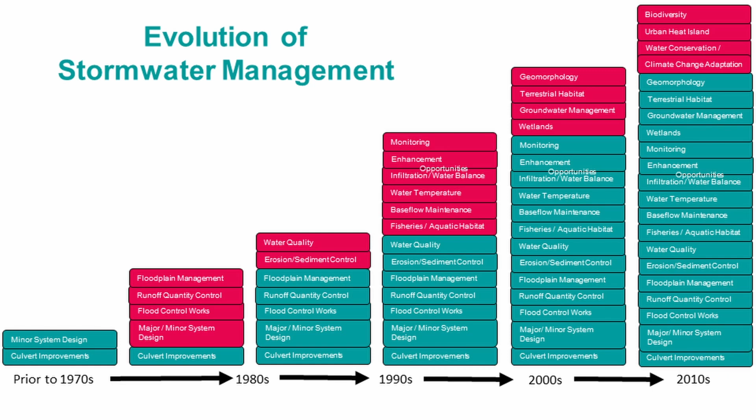Going back from pre-1970s, it was just get the water off the property as quickly as possible. Then moving into the 1980s, more thought around floodplain management and flood management, seeing more dry detention basins. Then into the 1990s, more turn to focus on non-point source or urban pollution. We start seeing some of the big wet ponds to try to manage that pollution.

And then to now, where we have this long list of things, in the 2010s, and realizing that the way we're going to address these is really recreating the natural hydrology. The way we do that is through more distributed stormwater management, doing more infiltration, sustainable urban drainage. So call it what you will. Back east, they call it low impact development. Around North America, they're calling it more commonly green infrastructure.

I tell people I work with in green infrastructure, they think I'm installing solar panels. So to be more specific, we'll say green stormwater infrastructure or green rainwater infrastructure. Over in the UK, they call it sustainable urban drainage systems, which I love because it's very descriptive and it has that awesome acronym of SUDS. But I'll be calling it green infrastructure or GI throughout this presentation.

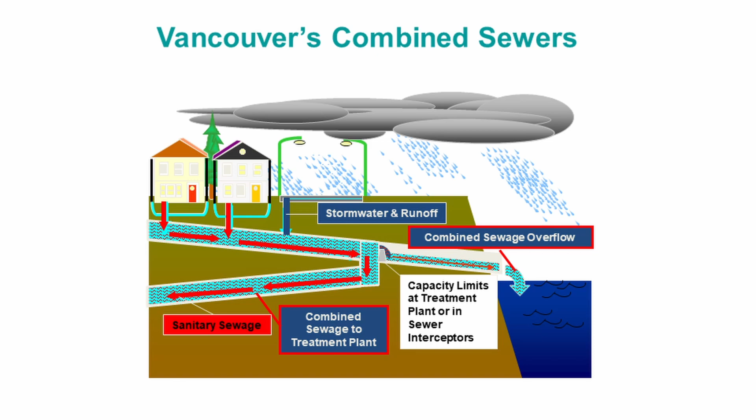There's a lot of different ways cities are tackling their combined sewer systems. Most are not bothering to separate them. They're finding other strategies to eliminate those overflows. Vancouver is on the path to separating its sewers. We've been doing that since the 1970s. We're to a point where half the pipes have been separated.

But essentially, because the trunks are still combined, all those separated pipes still go into a combined pipe. The whole system essentially functions as a combined system. So it's going to be at least another 50 years until it's fully separated. Making one pipe two pipes might sound simple, but when you consider the thousands and thousands of properties that also have combined pipes, it's a very complicated process.

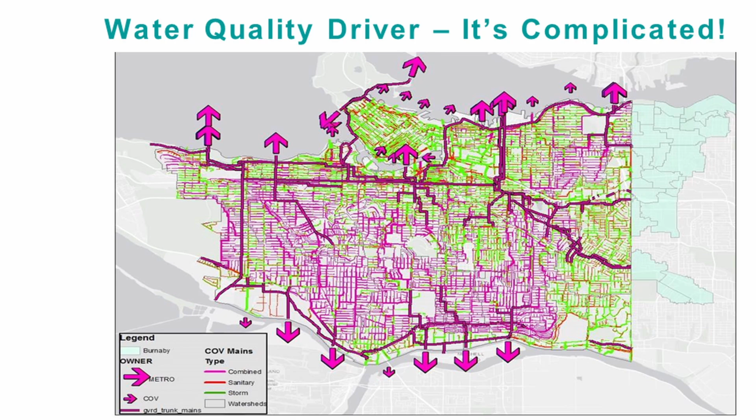Which takes me to why it's often really complicated for me to explain how green infrastructure is addressing water quality. When I've worked in those other combined sewer overflow communities, the goal is just to take water out of the pipes, keep the stormwater out of the pipes, and that translates into reduced overflow. When I worked in separated communities like in Mississauga, it's all been about cleaning the stormwater. But because we're in this transition right now, the green infrastructure, we're keeping volume out, which translates into less overflow. But then once the pipes are separated, that green infrastructure will be doing stormwater duty.

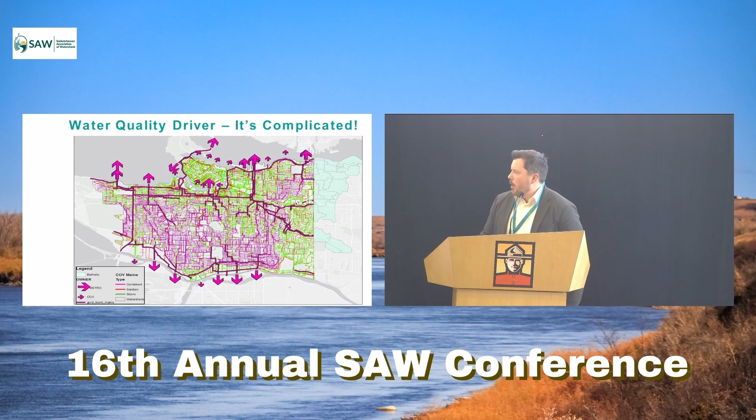This is one area that, coming to the city, I've actually had to do a lot of educating, because there's been so focused on just separating the sewers. We just got to stop this horrible combined sewer overflow. But what's been lost sight of is the hazards of stormwater. Stormwater is still toxic to the environment, and we don't want to trade just one problem for another.

So really, the sediment load between the two are very similar, but with the sanitary and combined sewer overflow, it's higher in the organics and bacteria, while the stormwater is higher in metals and hydrocarbons.

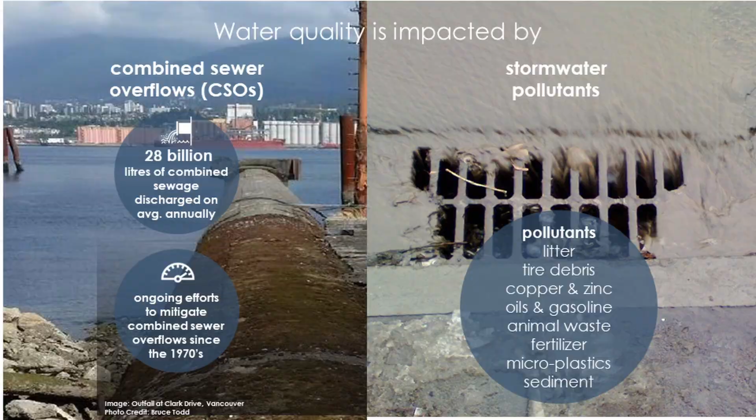So for other drivers, climate change: we're having wetter winters, more intense storms. We're addressing this in our future design, so we've updated our extreme storm design events and are upsizing our pipes for that. But we have all of this infrastructure built for those storms of yesteryear. So

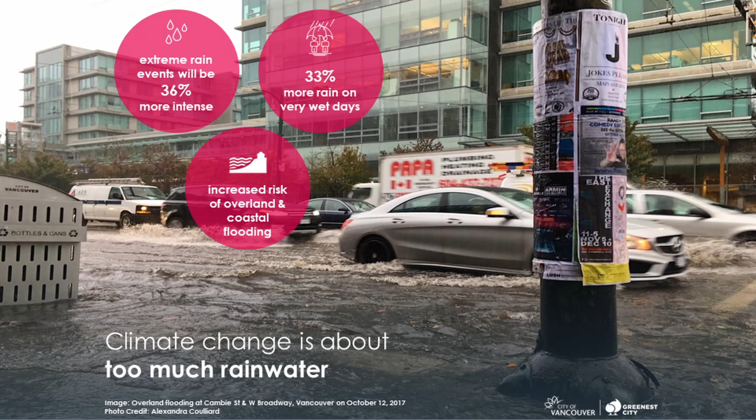have summers with less rain. We're dealing with too little rain. So our urban forest canopy is suffering. And those rare rain events that we do get in the summer, it's bypassing the soils and the trees. It's being wasted down the gutter.

So we're also doing green infrastructure to reduce urban heat island. And urban heat island has always been part of this long list of ancillary benefits. Really, we're doing green infrastructure for water quality and hydrology, but look at all these nice other things that it does. But this event in 2021, the urban heat dome, really changed that mindset.

You could consider this one of the deadliest weather events in Canadian history. Just in Vancouver, 117 people died. Recommendations was not just that cities need to redouble their efforts on urban canopy, but I was really appreciative that that report also emphasized the need for permeable surfaces. So we're getting that water into the ground so that it's available to be evaporated to cool the environment and also access for the trees.

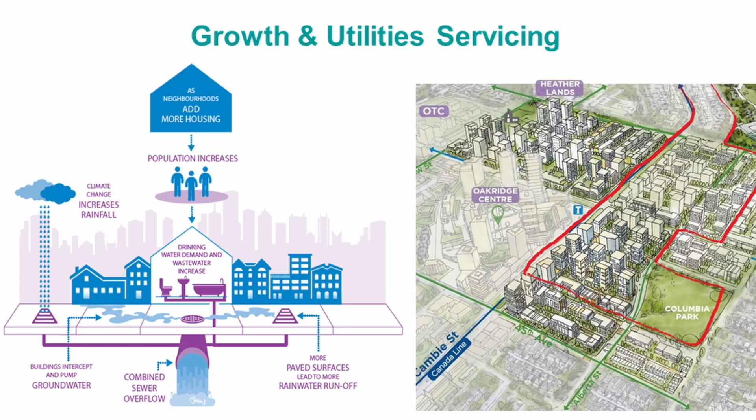Another driver is growth. We're densifying the city, huge housing problem. We have all these single-family residential neighborhoods that are getting turned over to mid-rise, high-rise development, lots more impervious area. So we're using green infrastructure to also compensate for those impacts, so to service that growth.

So then we've got this nice long list here of drivers for green infrastructure, why it makes good sense for the city. Climate change, water quality, ecosystem health, growth and utility servicing, equity and reconciliation. Basically, there's something for everyone there, whatever your perspective.

So let me tell you a little more about the green infrastructure tools that we're using in Vancouver. The tools that we're implementing now can be split into these four main categories here: bioretention, subsurface infiltration systems, permeable pavements, and rainwater tree trenches. We have about 400 of these assets in the city. As we grow and implement more and densify, I think the mix of these is going to change over time. I'm going to talk about each of these a little bit more individually.

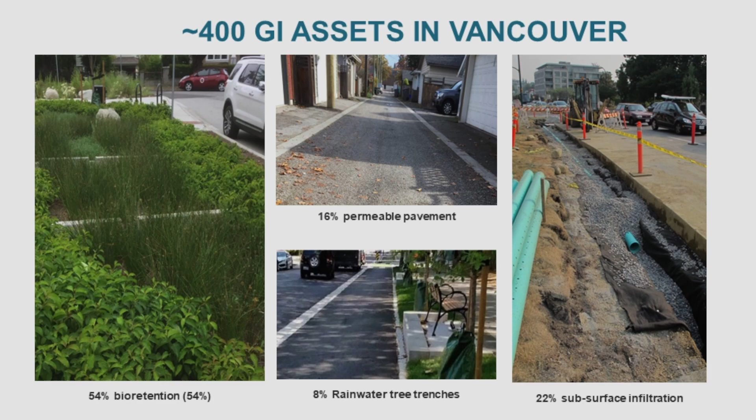So bioretention, rain gardens. This is my favorite. It's everybody's favorite green infrastructure tool to talk about, and we use it a lot. I think it's what comes to mind for most people when we talk about wanting to implement more green infrastructure in the city. Although sometimes I think it's to our detriment, because it can give people alarm bells saying, okay, you want to put these landscapes on every single street in the city. It's going to take up so much space, be such a maintenance nightmare.

But what we really try to emphasize here is that we're not necessarily going to try to create more landscape spaces, but making them more multifunctional. And these corner bulges here are a good example. So the city has been doing these for 30 or more years now to make intersections more safe. So these bulges at the corner reduce the crossing distance, slow down traffic.

The way they're designed, they always have this additional landscape boulevard space associated with them. So now we redesigned them so that that landscape space is also providing stormwater treatment and infiltration. So this is a very standardized approach we're taking. We have 100 of these, and growing, in the city right now.

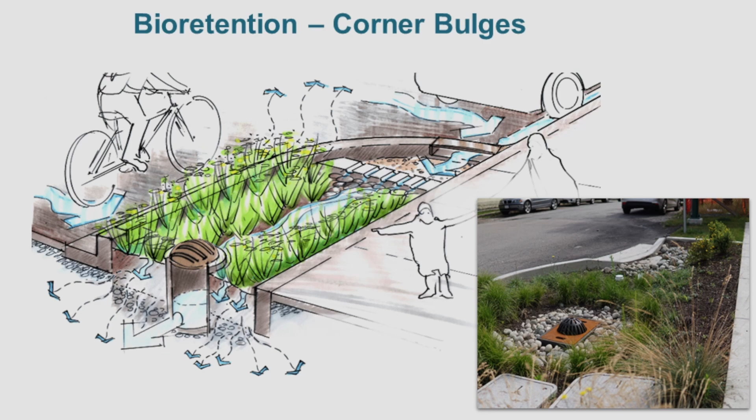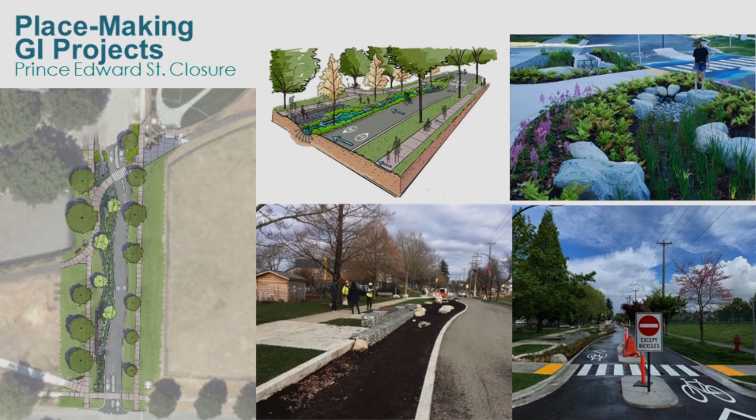And in contrast, though, we also have some larger installations of these bioretention landscapes. We call them our placemaking type projects. So these might be like a plaza space that has a large landscape component to it. There's also segments in the city of streets that are being closed down to traffic and turned over to active transportation and to green space. So this is where we can do some of these larger bioswales.

And what we're able to do there is take runoff not just from that one local street, but we're also taking runoff from a larger drainage area. And then these are also good opportunities for us to educate the public on green infrastructure.

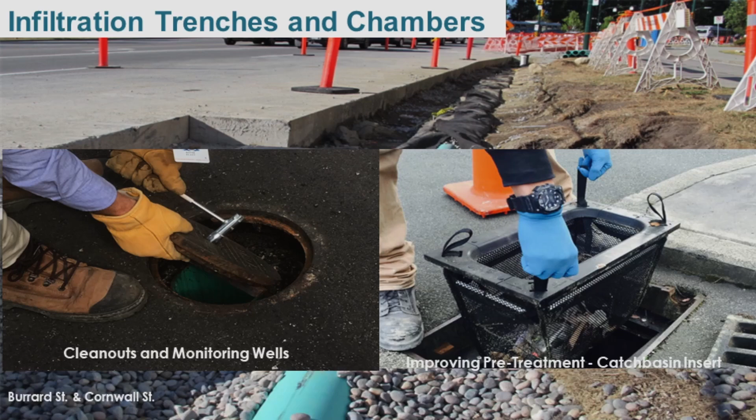And then the next group here, the infiltration trenches and chambers, basically just creating storage underground where we can hold the water so that it can infiltrate. Very simple, but some important aspects to this. One, we're trying to improve the pretreatment, and it'll depend on the land use and what's draining to it. If it's a residential street, we might have just a catch basin that drains to the system. It'll have a sump that provides some treatment, but we're also adding these inserts to enhance that treatment. Or if it's a higher loading situation, we might actually have a proprietary treatment manhole, like a hydrodynamic separator, that will do more pretreatment work.

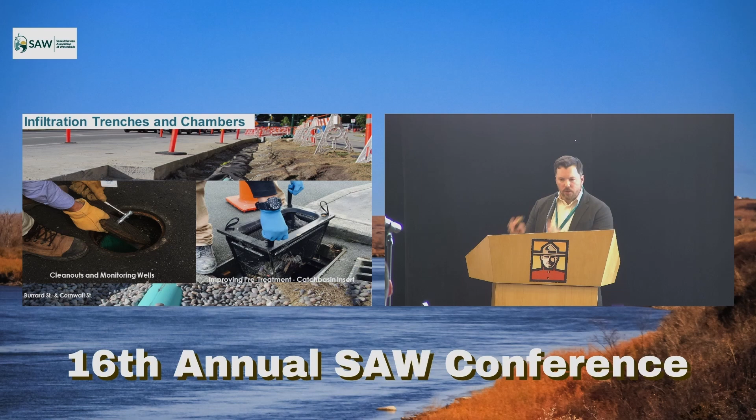And then the other aspect that's extremely important is these cleanouts and access and monitoring wells. We had a few of these systems that we inherited, legacy ones that didn't include these cleanouts. We've gone into them, we've tried to see how we can restore them and make them more functional, but there's just not the access, and we basically had to retire those.

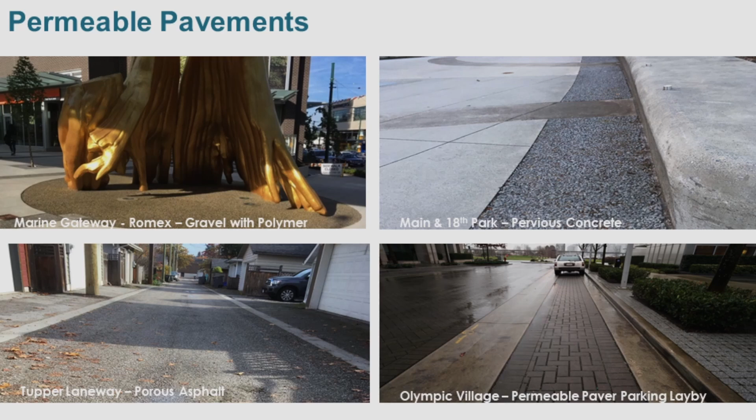And then the permeable pavements, we've got all the different types. There's the porous asphalt, pervious concrete, permeable pavers, even this newer type that's gravel mixed with a polymer. To be honest with you, there's not one that makes our pavement asset managers perfectly happy. They can't necessarily get the smoothness exactly the way they want, or the durability or loading to the extent that they want. But it's something that we're working closer to. We're about to test out a new porous asphalt mix this year.

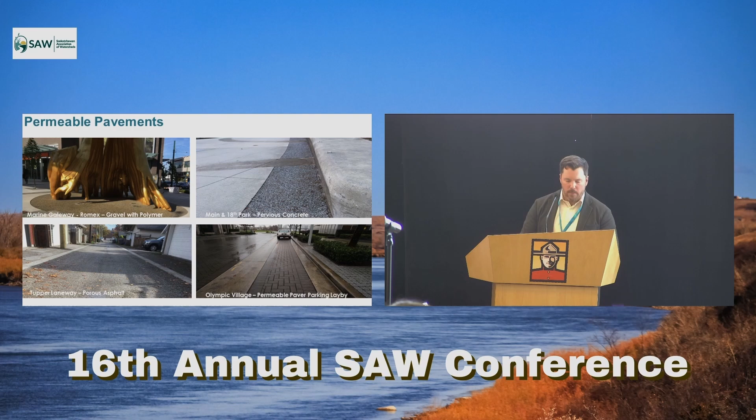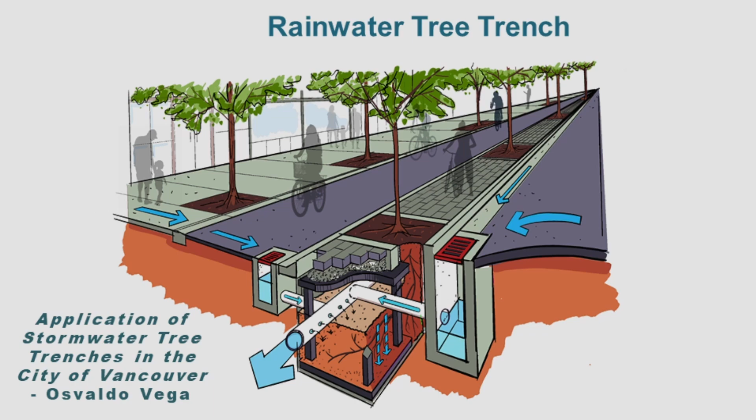Okay, and then the fourth category here, this is one that I'm particularly excited about because it works well in our densifying areas of the city: these rainwater tree trenches. So the way these work, since the 1990s, there's been a lot of effort to get street trees more soil volume, beyond that little tree pit cutout, where they can get access to air, water, loose soil under pavements. And there's two ways to do this. One is with soil cells, these plastic crate-like things that hold up the pavement, or there's structural soil, which is large rocks filled with loose soil.

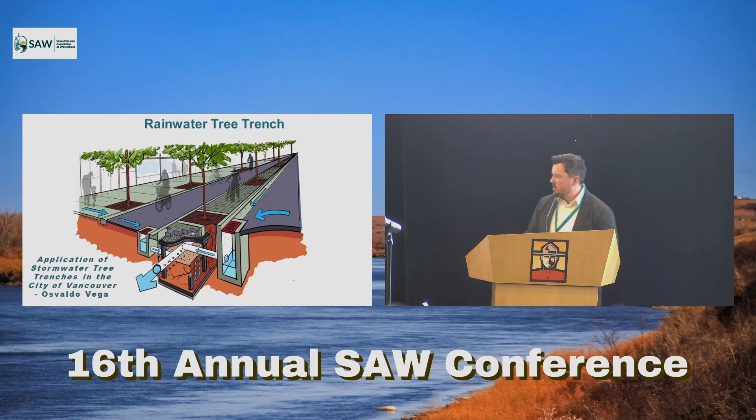So that's been done for a long time, but more in the last 10 years is adding the stormwater component to it, so using these volumes to also filter and infiltrate stormwater. So that's what that figure is showing here. So we see a lot of potential for this in Vancouver, so much so that we engaged a UBC researcher, Osvaldo Vega, to do a literature review for us on the technology. Basically, we found that the performance is similar to bioretention. It's basically like an underground bioretention system.

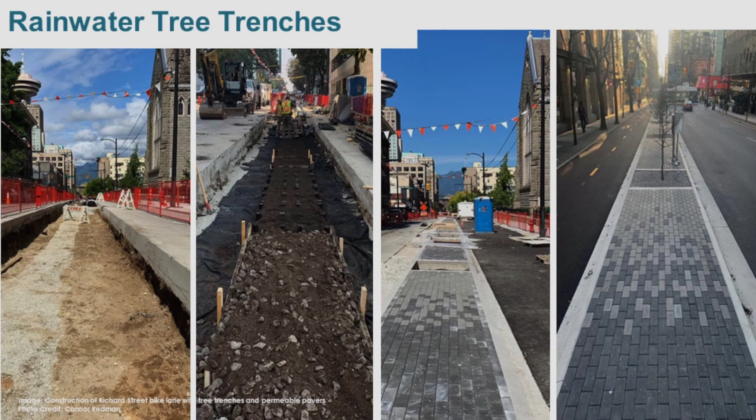And there's actually 3 ways that water can get into this trench. One, down through the permeable pavers. The tree pits also have curb cuts in them, so water can get in through these curb cuts and soak into the tree pit. And then, like I showed in that diagram, the catch basins also redirect water to a perforated distribution pipe along the length.

Why we're excited about these and really like them is it's really a win-win-win, because foresters are happy about them because it gets more soil volume built in the city and gets water to the trees. It makes the urban designers happy because it's not taking up valuable space on the surface in the right-of-way, and it makes the pavement asset managers happy because we're keeping the roots down deep where they can get the space, the air and water they need without popping up the sidewalk and creating trip hazards.

So yeah, those are our tools now. So, launching this program and making the case. The program, the Green Infrastructure Branch, was launched when I joined the city in 2017. And there are really, I think, two essential elements that we needed to start the branch and to really expand our work and mission at the city.

The first is that regulatory stick. In the U.S., they have the Clean Water Act at the federal level that's really driving green infrastructure implementation in cities in the U.S. So a lot of them are further ahead, and that's largely due to that regulatory stick.

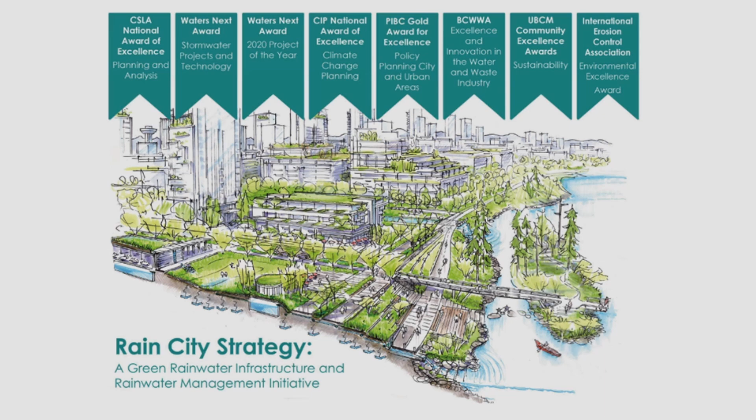Okay, so making the case. Now we've got the leadership; making the case for the drainage engineers. I've worked in a half dozen cities. I get the same kind of concerns and comments from those engineers about why it won't work here. Our soils are too tight. What about when we get extreme events? We get back-to-back storm events, or these systems are just going to clog and fail.

One of the issues, I think, is just a discrepancy in how engineers are trained. Engineers are trained to design for the extreme events, and rightly so. We want our buildings and bridges to be built for that worst case scenario of high loading. We want our flood and conveyance systems to be designed for that extreme storm.

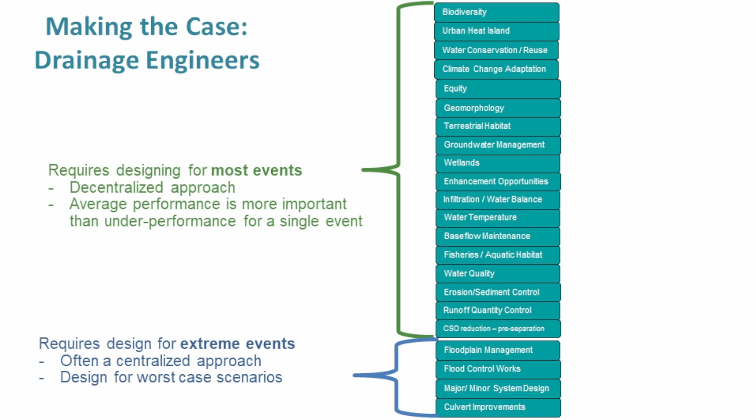But going back to that long list of goals at the beginning of the presentation, most of those are actually not about how that particular asset is doing on its very worst day of the year, but how it's performing on average over the course of the year. What is your pollutant loading over the whole year? So that's one of the points I need to make to those professionals: it's not necessarily how that one asset is performing on its worst day, but how it's performing on average.

The other difference is the centralized versus decentralized mindset. For a centralized asset, you need to make sure that it's functioning in that worst case scenario. Failure can be catastrophic. But when you have a distributed, decentralized system, it's okay if one asset here, one asset there, is failing or underperforming, because there are going to be other assets in the network that are overperforming. It's how the whole system is functioning on average.

The other thing we get is that it works over there, but it doesn't work here. We can show all the data and studies from other places around the country, but we still find that we have to do the monitoring locally to prove that this is going to work here. So we actually have quite a robust monitoring program at the city, and we publish monitoring reports biannually. We just published our second one, so both of those will be up on our website. And I'll talk a little bit more about that.

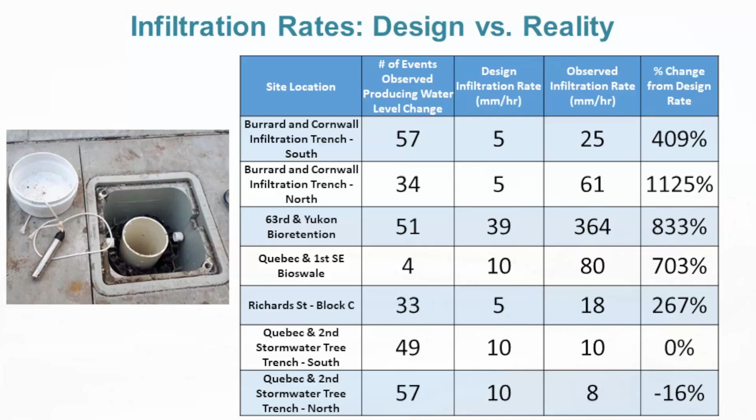And then when we build the systems, we put in these monitoring wells. We have these cigar-shaped water level loggers that we can see what the drawdowns are for every single event. We see a big difference. I just have a few of the sites here, but we've monitored dozens of sites. I've included the one site where we have very similar between design and post-construction performance, but most of the time we see doubling of performance after post-construction.

So curious, I talked to green infrastructure managers in other cities in the U.S. and Canada. They see very similar kind of results. I have some theories as to why. One of those kind of goes back to that designing for worst case scenario. So those design field infiltration tests, they're set up. The formulas are all set up to give you the saturated hydraulic conductivity.

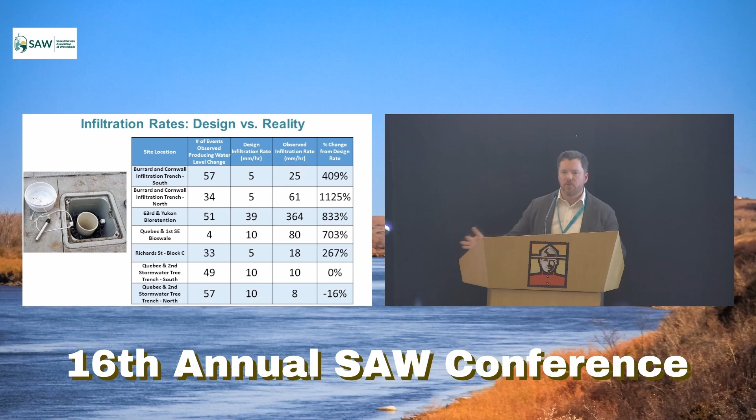So we're still considering how we might adapt our designs to take this into consideration. Right now we're using a lot of the recommended factors of safety on those infiltration rates. That might be something that we might take away in the future.

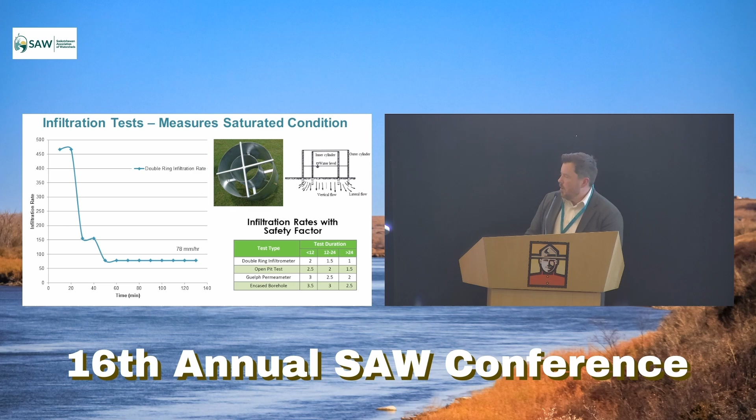And then this still blows my mind, but we see improving performance with our bioretention systems over time. Infiltration increases with time. And this is very counterintuitive to engineers, people who work with filters, because the whole thing is that the performance is expected to decline over time until you have to replace it. But the big difference here is the living component of the system. The plants and microbiota build that soil structure over time, maintain that infiltration capacity, can even improve it.

And that sediment that comes off your streets or land use can and gets incorporated into that soil structure over time. But granted, there has to be a properly sized bioretention system. If you have an undersized system, it could still get overwhelmed with sediment and decline with time.

Okay, so we've made the case for the drainage engineers. Now everybody else, and I mean everybody, because green infrastructure touches everything. We had to go and present a roadshow to every department and branch in the city. On the private side, they need to update their regulations and rainwater management requirements. They are doing more green infrastructure on their side. We were reaching out to our O&M branches about how they're impacted, how they might have to change some of their standard operating procedures, or might even be involved in the future maintenance.

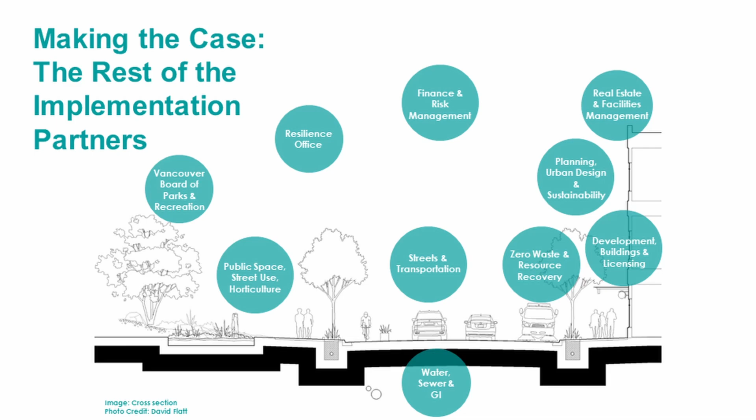And then also working with our capital infrastructure design branches, because we have to work with them to make the space for green infrastructure, which really brings me to the next section: making the space for it. Water, sewer, electrical, all of these things have been growing together for decades, standards developed over decades. Now here, green infrastructure, we're this new kid on the block trying to elbow in our space in this limited right-of-way. There's some cases where the asset uses are very compatible and don't conflict, but others where they do conflict, and you have to develop new standards and offsets for how these things will work together.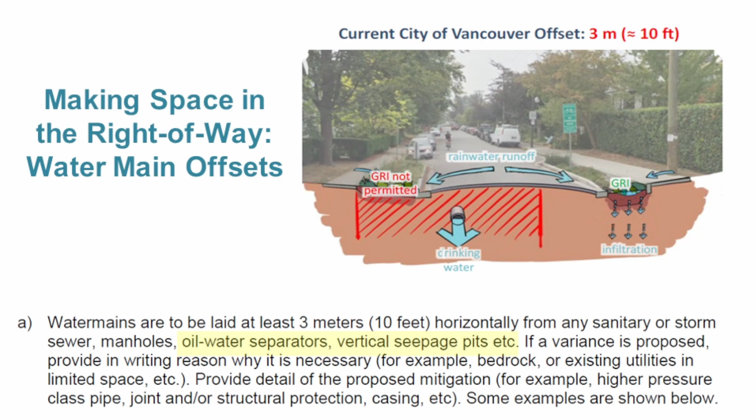I'll give one case study here, working with water. Not all cities, I think, have quite this restriction, but this is the most restrictive I've come across: this 3-meter offset requirement for green infrastructure from water mains. When you think 3 meters on either side of a water main, and water mains are usually off to the side of the street, that's basically half of our right-of-ways that are off limits to green infrastructure.

Now, granted, they'll allow green infrastructure to be in that space with certain mitigation measures, but all of that is done on a case-by-case basis and can be quite costly. So this is something we've been working on with our water design group and public health for over 5 years now, digging into the history of this language here that I have at the bottom.

But the language here also includes manholes, oil water separators, vertical seepage pits, and kind of ropes in all types of stormwater management. I think this is where it's frustrating for me, is that it's this mismatch from a different era. And I'll give you an extreme example of how we get into this big gray area with green infrastructure.

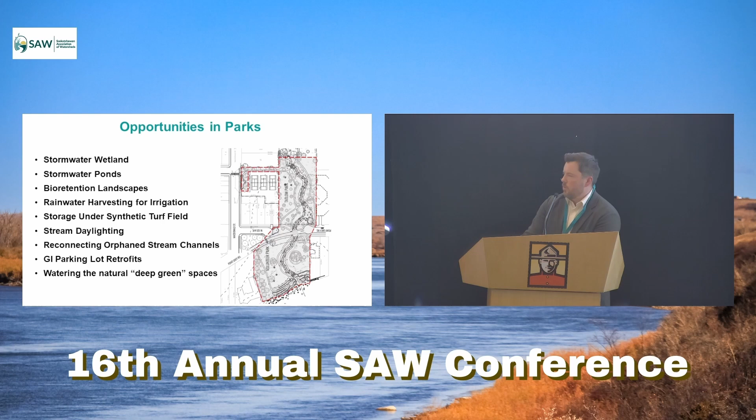We've made some improvements and enlarged some culverts. We're just finishing this off now, so the stream can potentially take returning salmon. So some recommendations on approaching parks with these projects: certainly emphasizing that we don't want to take away any park uses. If anything, we want to emphasize opportunities where we can enhance park features.

Also highlight opportunities where we can fund park renewal. So we have this project where there's a need for a new synthetic turf field. It's also in a spot where we need to do a lot more stormwater storage. So engineering, we're coming to them with stormwater money to do the excavation, put in the base that'll have the stormwater storage, covering those costs, and then Parks just needs to cover the cost of the synthetic turf surfacing. So that's just one example that can advance some needed park renewal projects.

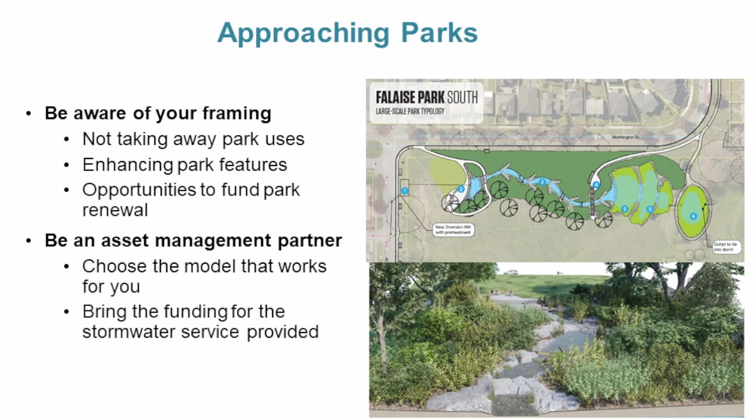The other is to come to them as an asset management partner, not to say, okay, we're going to help you build this into your park, and then it's all yours. You have to take care of it. But coming to the table with the maintenance funding to pay for the stormwater service that it's providing. And that might depend on how your municipality is set up. Could be, okay, we're going to split up tasks. Parks, you're going to handle the aesthetic and horticultural aspects of this project, and streets or stormwater crews will handle the sediment and structures. Or maybe Parks takes over the whole thing, but they have a charge code that charges to like a stormwater account.

Okay, and then now to build the thing, it does require a different type of construction. The sequencing is different. It's things that contractors aren't used to, and if they're not familiar with it, they'll think, this is crazy, why is the city asking me to do this? I think it's really important up front for them to understand the purpose. And so we put a lot of energy into the kickoff meeting. We can give the whole roadshow or talk about the drivers. It helps to give the contractors some buy-in, and once they understand what we're trying to achieve, they actually come to the table with a lot of ideas themselves or better ways of doing things to get the construction done properly, and build an infiltration spot in a built space.

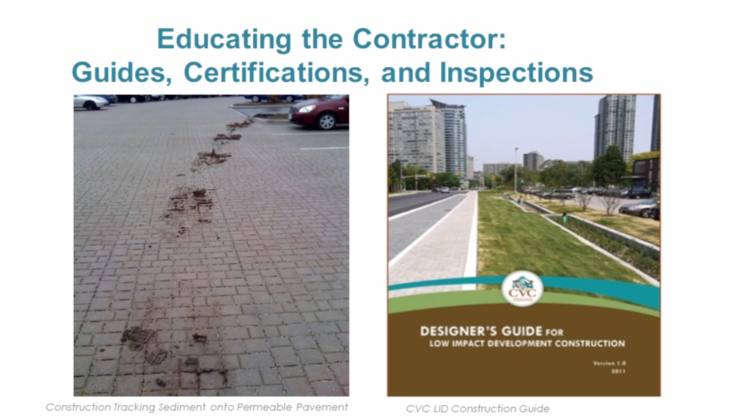There's a lot of great resources out there. Credit Valley Conservation in Ontario has this low impact development construction guide that's recommended by the US EPA. There's also a certification program for contractors and inspectors called NGICP. A lot of jurisdictions actually use that certification as a requirement in their bidding. The bidders need to have somebody on the team that has done that certification. San Francisco, they have a specific training program for their city that their contractors must take. In Vancouver, we haven't gone that route yet.

One concern or doubt I have is, is that trained person actually going to be the one on site? Are they going to transfer that knowledge to the people working on site, let alone their subcontractors? So where we really put our energy into is the inspections, and getting an inspector out to the site frequently. That makes sure that the project is being built correctly. Hopefully we're building a relationship that's more like a partnership and helping to train the contractors in the field, in a hands-on kind of way, which I think is maybe more effective than some of these classroom certification programs. So that's our tactic at the city.

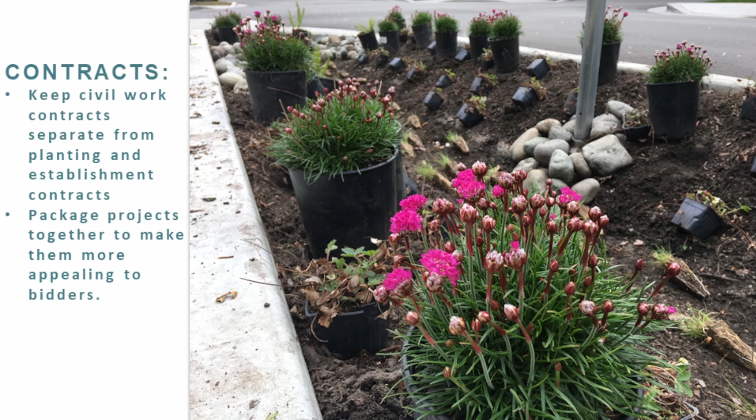And then another recommendation I have for construction is keeping those civil contracts separate from the planting contracts. So the civil works contractors, the people that are doing the excavation, laying the pipes, installing the concrete, once that work is done, they want to be off the site, done with the project, and they'll hire your cheapo subcontractor to put in the plants. And no matter how much you pester them, you won't get the dead plants replaced until the very end of the warranty. And really, that's not, in my mind, a completed green infrastructure project. A completed green infrastructure project that's ready for your standard maintenance is one that has established plants.

So one thing that I found very successful is we keep that civil work separate. When they finish the project, they put in the bioretention soil, they put in some erosion control, and then we have a separate contract with the landscaper that we chose, and they have a clear understanding that establishment means watering or replacing plants as needed. And then after the 2 or 3 years, it's a facility with mature plants. That's been very successful.

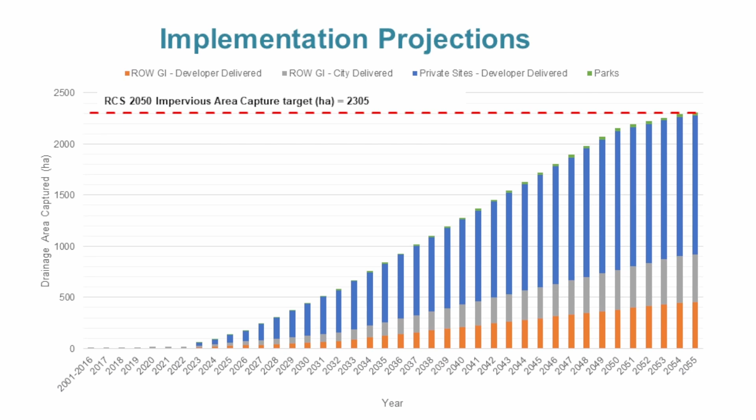Okay, and then finally, managing the assets. We're going to be installing a lot of these assets. We're in the hundreds now. To reach our goal in the next 30 years, we're going to be in the thousands. We want to manage 2,000 hectares of impervious area with this green infrastructure. When I show this to finance, their eyes pop. Like, how many assets are we going to be adding to the city? And what is this liability going to be? How many assets are we going to have to replace in 30, 50, 100 years?

But I think a very important point is to emphasize that it's not necessarily all additive. It's taking an existing asset and making it more multifunctional. So I talked about that with the landscape assets, with permeable pavement. It's that paved laneway, and we want to make it a permeable pavement laneway.

That pipe that's connecting that catch basin to the sewer, we want to make that into an infiltration trench. So it's not a new pipe, but it's a perforated pipe that's draining into this gravel trench bedding.

I think another thing we have to get used to, building these asset management programs, is the complexity of the green infrastructure asset life cycles and the uncertainty. We've been starting to implement these over the last 30 years, but we don't have a whole lot of history on exactly what the life cycle looks like.

And we're also seeing this can be very complex and situational, how long an asset might last until it needs to be fully renewed. And the life cycle isn't always as straightforward as build it, maintain it, and then replace it. We're finding that there's a lot of these internal loops as well, where you can do some cost-effective rehab to bring the asset back to functionality. So, for bioretention, it might be just replacing the first few inches of soil and replacing the plants.

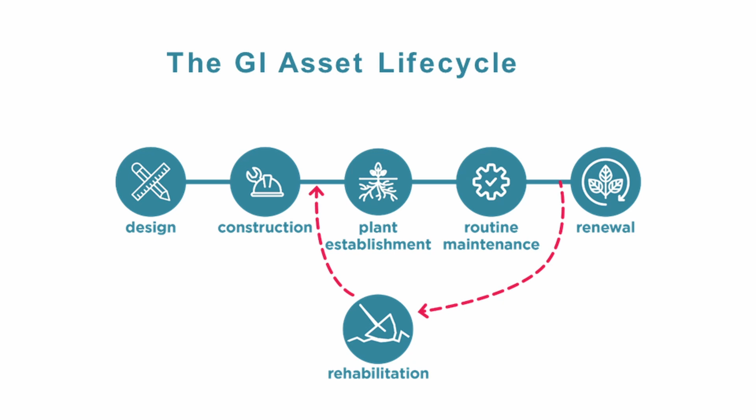For permeable pavement, we have this example here. The Olympic Village was built with these permeable pavers over 15 years ago. There was no green infrastructure branch for all that time. It wasn't getting maintained. No vacuum sweeping. So it was clogging over time. Our branch comes along. We do these infiltration tests. Very low, very highly clogged pavements.

We go and do some power washing and replacement of some of the filler material between the pavers. We're able to bring the infiltration right back up to where it was at installation. So even if you have budget cuts and some of these systems can't be maintained, they're not completely foregone. You can bring a lot of them still back to functionality.

Building an operation and maintenance program doesn't have to be scary. You start small. We still have a relatively small group of assets that can be done with just a handful of contracts with contractors. We've got our system set up with these 3 different programs. The Green Infrastructure Rehab Program, so taking all those legacy assets, doing some of those rehab actions to bring them up to our functionality standard. Then we have a maintenance program specifically for the vegetated assets. It takes a very particular skill set and equipment, and then a separate one for our non-vegetated assets that takes a different set of skills and equipment.